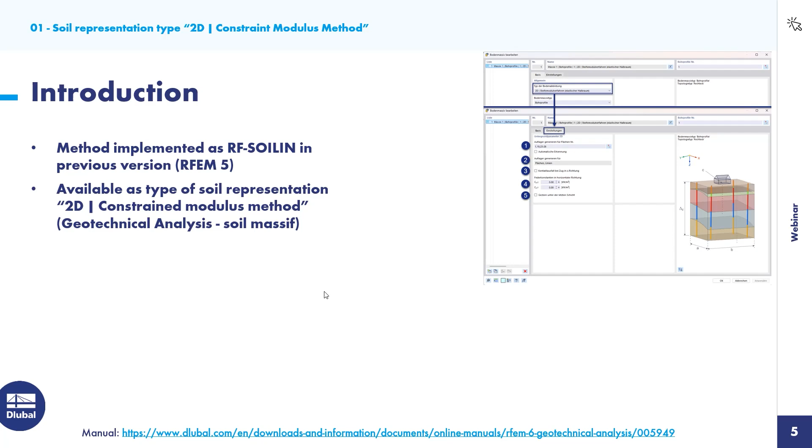So now we start with the new 2D constraint modulus method. This was a former version of RFEM 5 implemented as RF-SOILIN. Now it is available as a 2D constraint modulus method. Therefore, you have to activate the geotechnical analysis add-on and select a soil massif. Afterwards, the soil-structure interaction can be handled via generated spring stiffnesses. They depend on the soil properties, such as the layers and material, as well as the load and the foundation geometry.

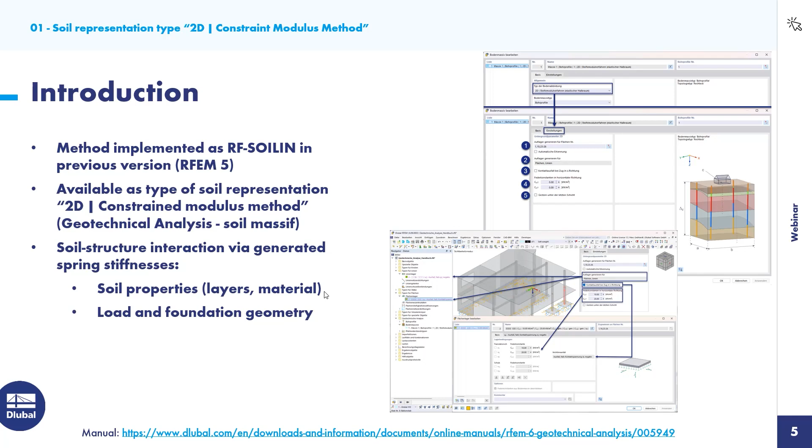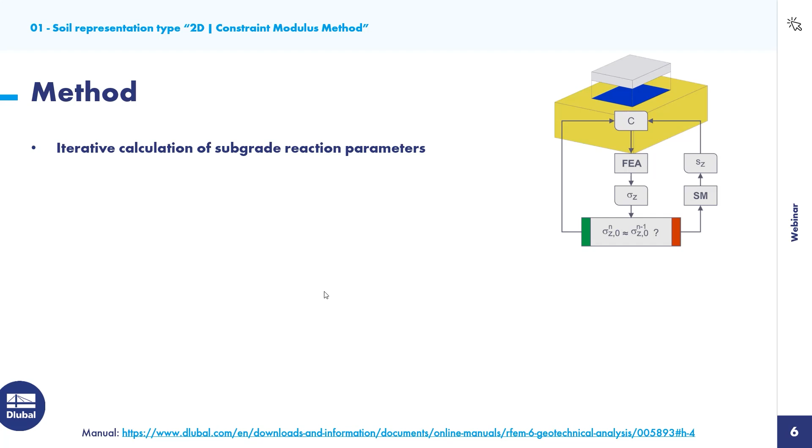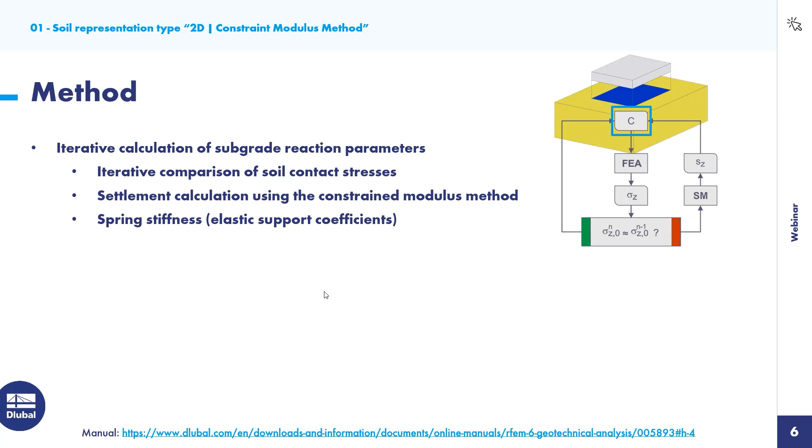Now I will describe the method. The constraint modulus method implemented here uses the iterative calculation of the subgrade reaction parameters by iterative comparison of the soil contact stresses. If the contact stresses from the former iteration and the actual iteration are not equal, the settlement calculation is done using the constraint modulus method and gives back spring stiffnesses as elastic support coefficients. They are available first of all for the surfaces and additionally for the lines, to get additional stiffening from the adjacent soil.

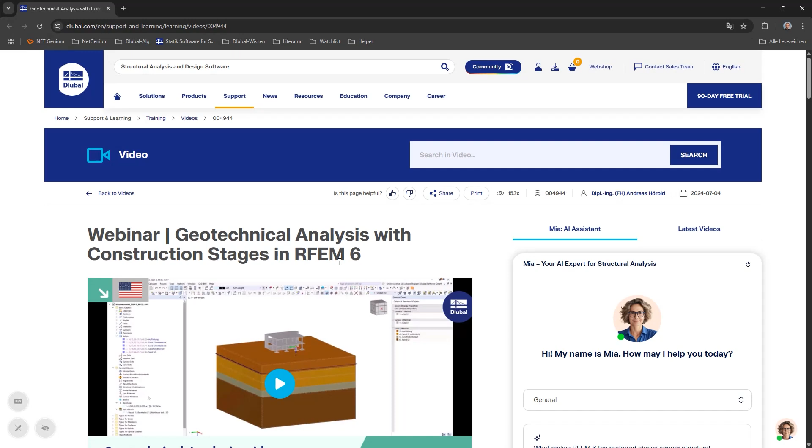Now we go to RFEM 6 and load the model from a former webinar, and I will show you the place where you can also download it. Here it's the webinar geotechnical analysis with construction stages, and there was a 3D analysis with a nonlinear material behavior based on the hardening soil model. You can download the file down there with a building and an already generated 3D soil. So go back to RFEM 6, and we see it's already loaded.

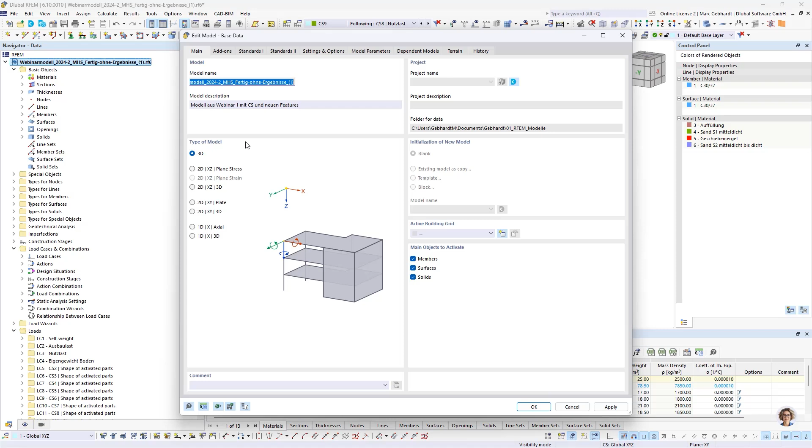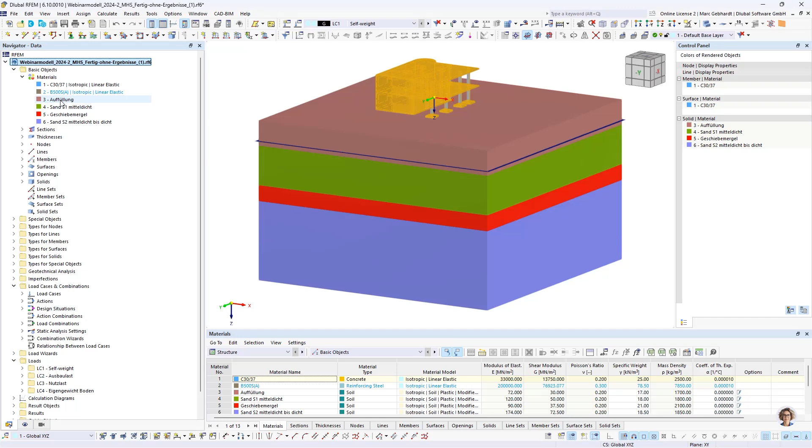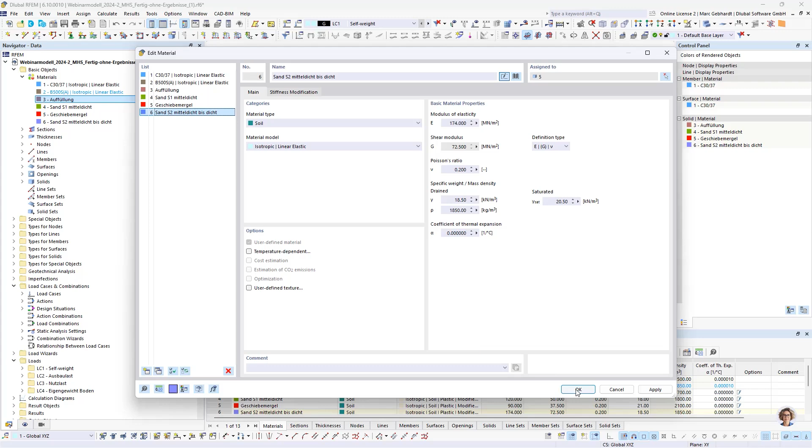We see there are already materials defined. They're using the modified hardening soil, and as you see here, they have basic material properties which rely on the loading and unloading Young's modulus. If this is really true for a 2D linearized behavior, it's not completely sure, so maybe for a real project you have to check it. But now, to simplify, we just select linear elastic, and we see the Young's moduli of the soil materials are changed and the behavior is now linear elastic.

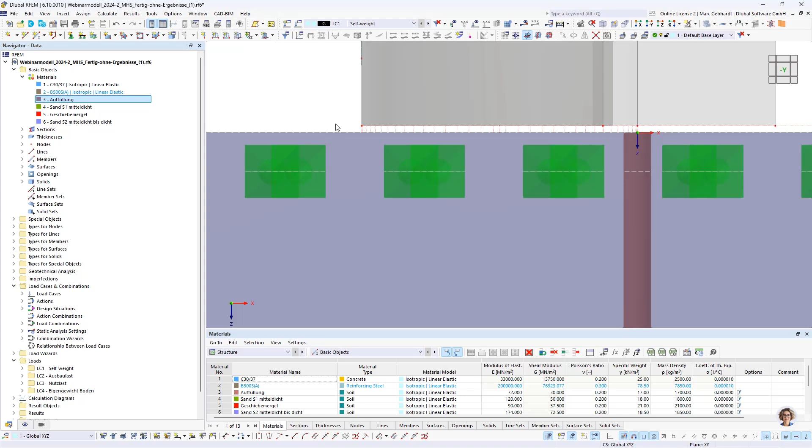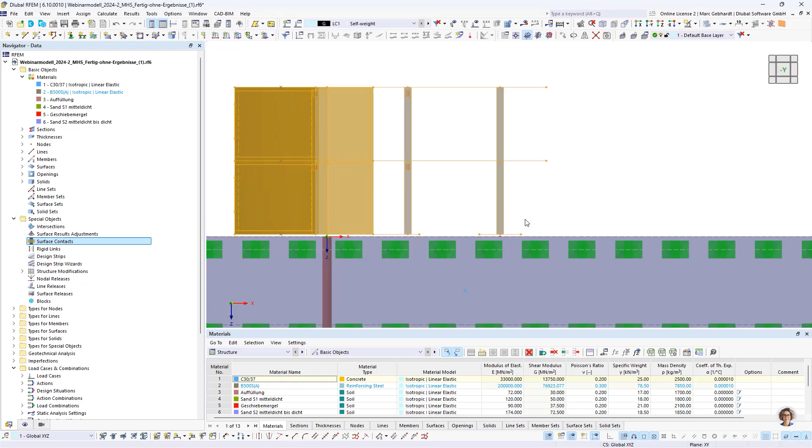Furthermore, we don't need surface contacts anymore. At the moment, the building is 10 centimeters above this upper soil surface. We don't need this anymore because the springs are generated automatically, finding the surfaces when they are on the upper surface of the soil massif. So we go to special objects and delete all surface contacts. Afterwards, we move our building 10 centimeters in Z direction. Now the base surfaces are touching the soil massif.

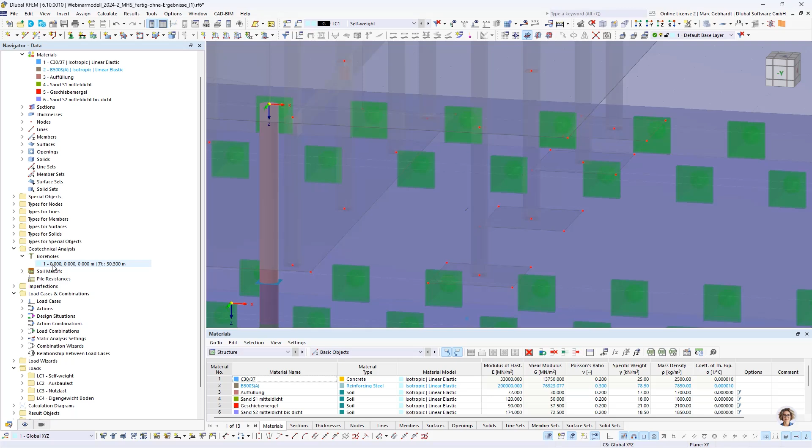Now we take a look at the soil massif itself. In geotechnical analysis, you find the boreholes, which are already defined by the other webinar, with the soil materials shown earlier. By them, a soil massif is generated, at the moment in 3D, but we want to change it to the 2D constrained modulus method. Now we see the additional settings tab is open, and here you have to select where the supports will be generated. You can select the surface by hand or use the automatic detection. Furthermore, in the future, it will be available to select on which parts of the surfaces, such as only surfaces, lines, and nodes, the elastic support coefficients will be generated.

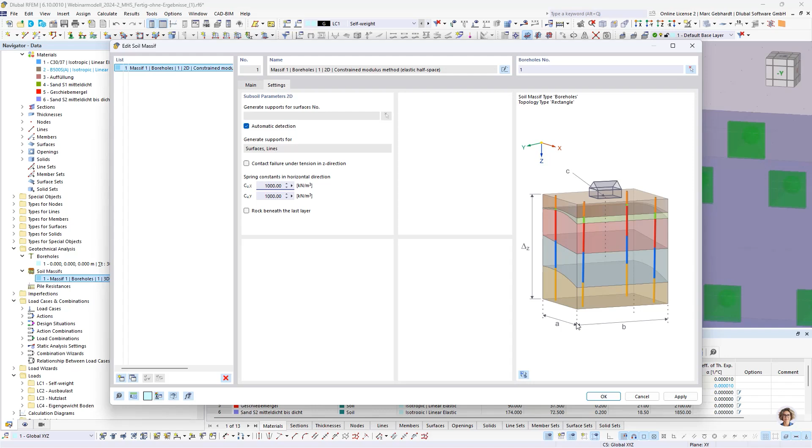And you can select to get nonlinear behavior on the surfaces and the line supports. But the constrained modulus method already has a failure under tension. Additional to the generated supports in vertical and shear direction, in horizontal direction, fixed supports can be defined here. And on the last point, you can select rock beneath the last layer, which says that the soil massif under this last layer is completely fixed, supported, and no settlement will happen, and stiffness will be very, very high, and so it stops there.

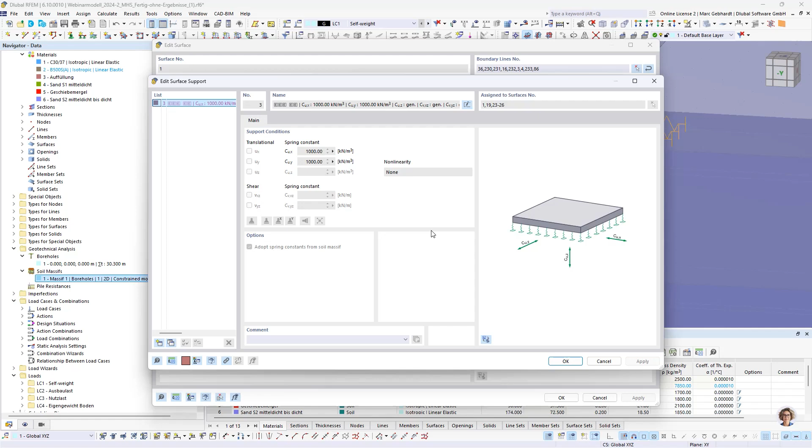And now we generate the supports, and we see now here our surface and line supports are generated. Take a look at them. We see that here in horizontal direction the fixed values are applied, and in Z and shear direction they are generated. Same applies for the line supports here, but they are only generated in Z direction.

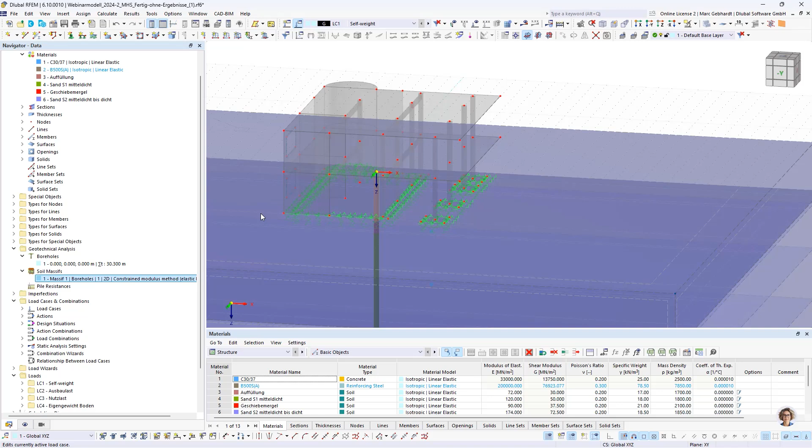Now we can start over with the loading. We don't need any more self-weight of the soil, because this is already applied within the constrained modulus method. So we delete this case. Now going over to the design situations, and we'll use the combination wizard for the ULS and the SLS quasi-permanent case.

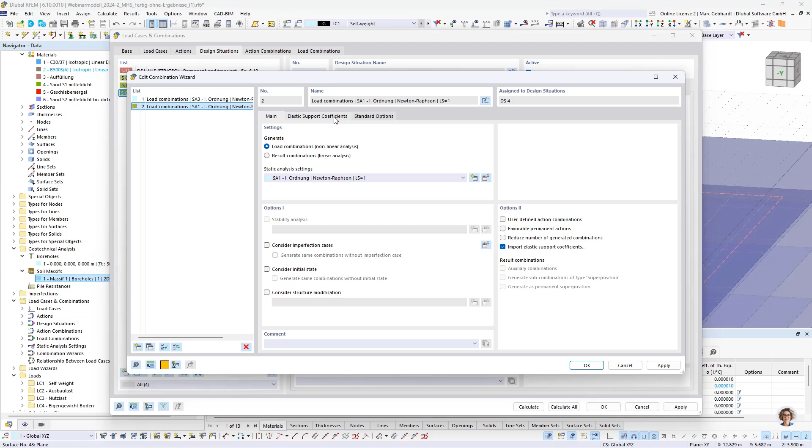So we use the second load combination with one load step, and also want to import the elastic support coefficients, a great feature to speed up calculation time, and as well get other support coefficients from a load case, maybe an SLS load combination to ULS. So we search for the corresponding from quasi-permanent for all of them. Good, OK. Go here also to OK. And now see there are some load combinations automatically generated.

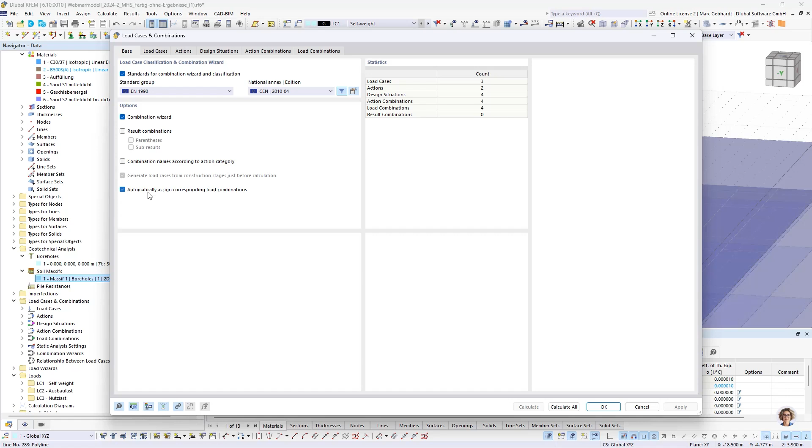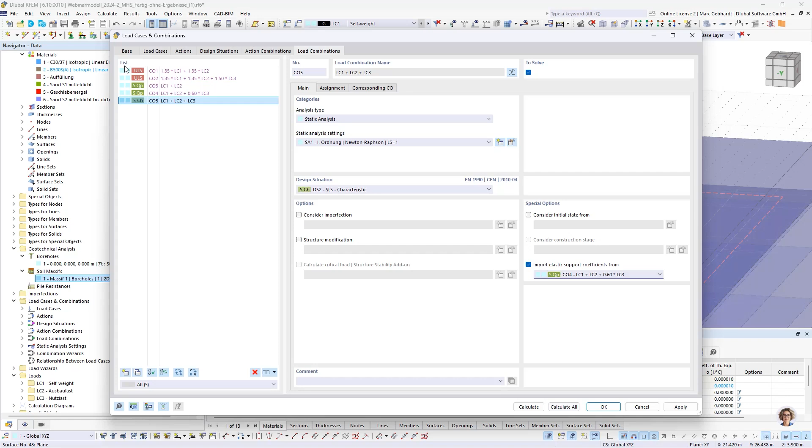Now we see here the elastic support coefficients will be calculated, and here they will be imported. To see the corresponding combination, at this point we will use automatically assign corresponding load combinations. And now we see they are visible here. We can also assign them by hand by taking a new characteristic SLS combination, setting the load factor 1, and assign them by ourselves here. Now we can calculate all of them.

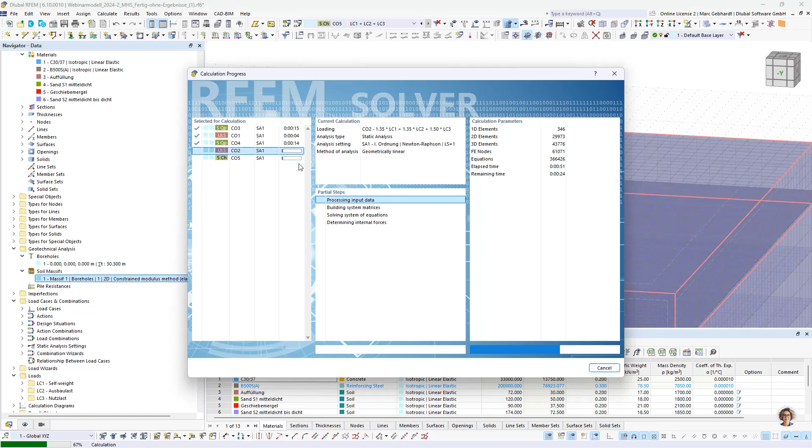As you will see, the settlement will be a little less than in the 3D calculation, which comes from the different behaviors of the methods, as well as of the implemented material behavior. Afterwards, we will check the settlements and as well the imported elastic support coefficients, and we'll see the different behavior of the soil building interaction. So as you can see, it's much faster than 3D calculation, but it also needs a few seconds.

And I forgot to show you something. It's within the static analysis settings. You have an additional thing for geotechnical analysis for the 2D constrained modulus method. If sometimes the iteration can't find an equilibrium, you can give a higher number of iterations or a lower precision by a higher value here.

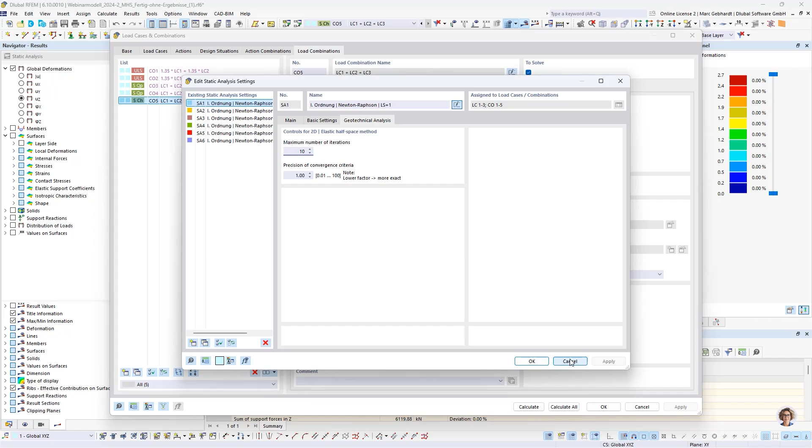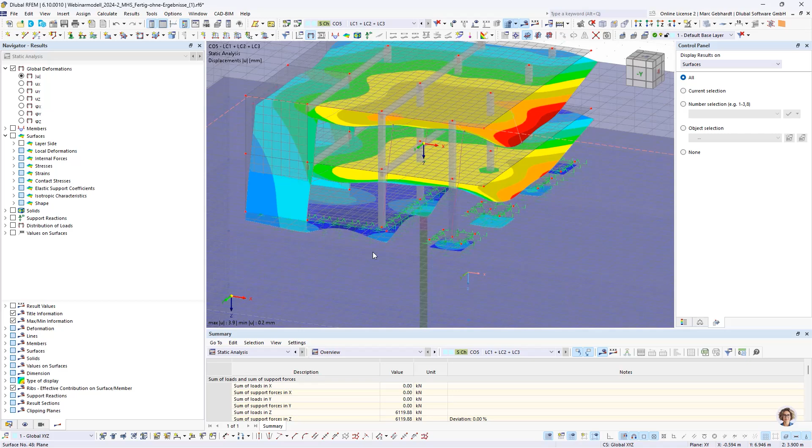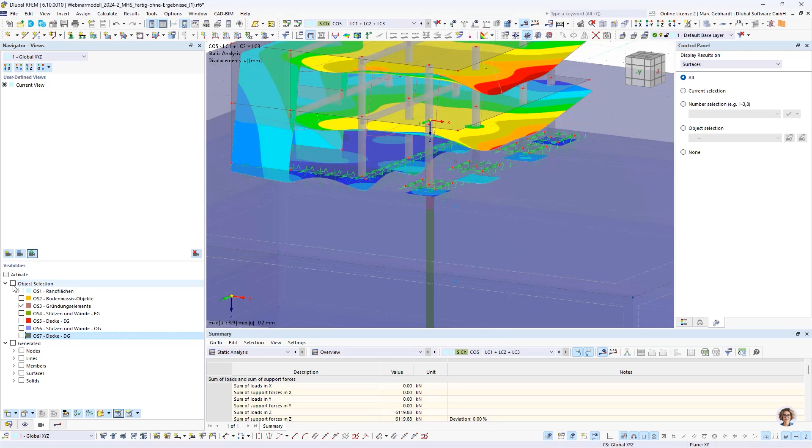But now we will see global deformations and can deselect all solids because they are not of interest at this moment, but would show all surfaces. Now we see the overall behavior is like it was for 3D. You see a higher settlement on this column, and as well in the middle on this middle wall than on a normal plate. At this point, we only want to see the base and also want to see the lines on the bases and not only the surfaces.

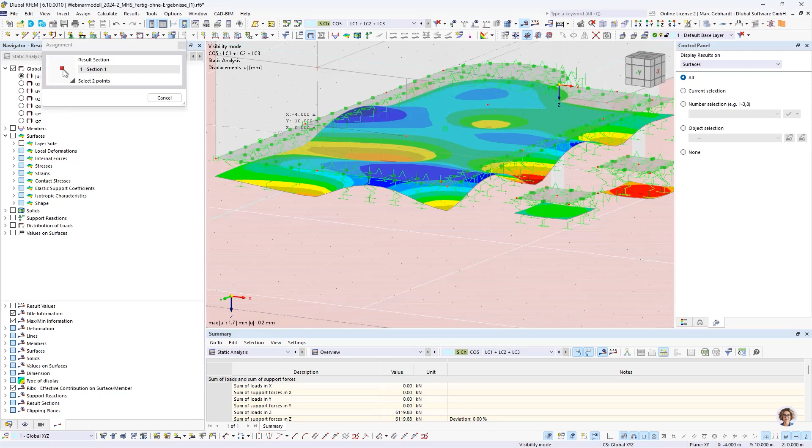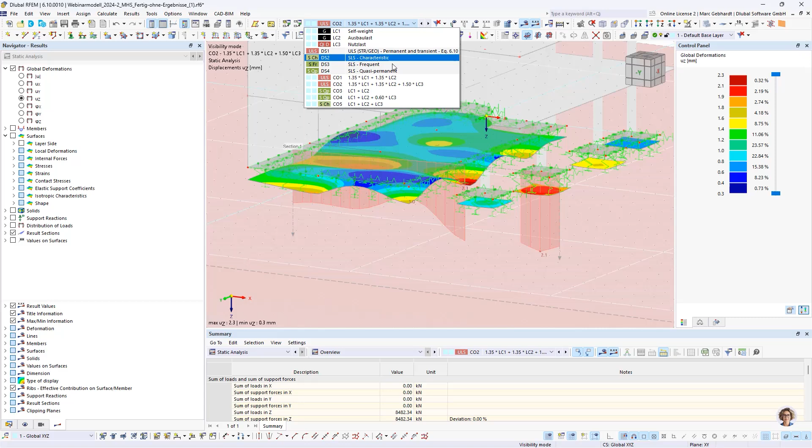So now we can also go through a result section and define this from here to there for the surface, and let's show the values on this result section. Now we see global deformation. It's mostly in that direction. That's true and right. And the characteristic, we have 1.7 compared to the ULS definition from 2.3, 1.6.

So, we can now check the elastic support coefficients on surfaces. Sorry. At this point I would show this one. Yes, those are the values I would show. And also within the support reaction, the elastic support coefficients for the lines. And we see in this and the other assigned, they are equal, so the input works as expected.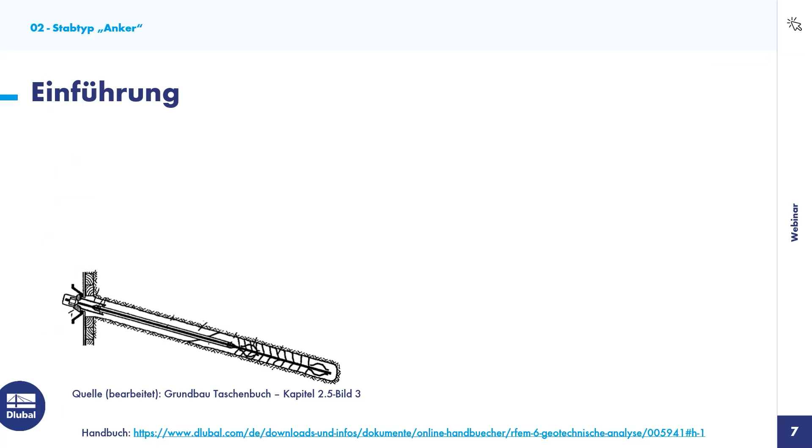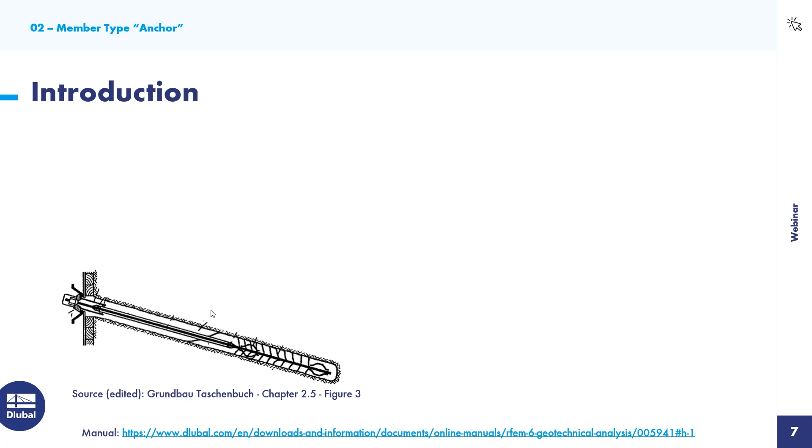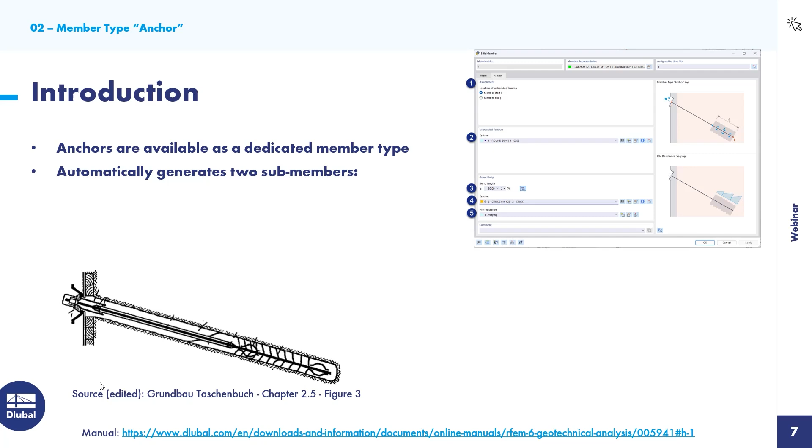So we're going forward to the next point, and I'll show you our next exciting feature, the anchors. Anchors are now available as a new member type within the geotechnical analysis add-on. They can be selected by the Add Member menu and automatically generate two new sub-members. This is first a tendon part without bond to the soil around that can only bear tensile forces, and a grout body with bond to the soil around, which corresponds to the member type pile with a pile resistance.

And now go over to the prepared model. You see here a slope stabilization for heavy goods traffic on top, modeled as a 1 meter slice volume with supports only orthogonal to the side faces and constraint support on bottom.

We have to select in the base data the geotechnical analysis add-on, and additionally, for a good representation of the stress state for the soil, the construction stage analysis, and for a later investigation about variable load, the structural stability add-on.

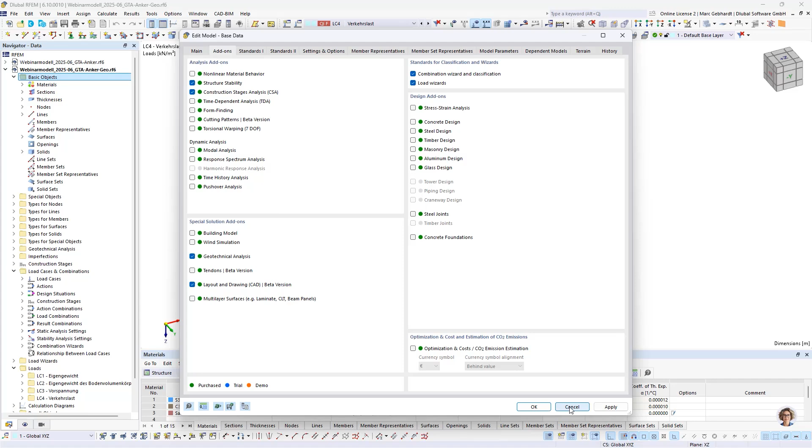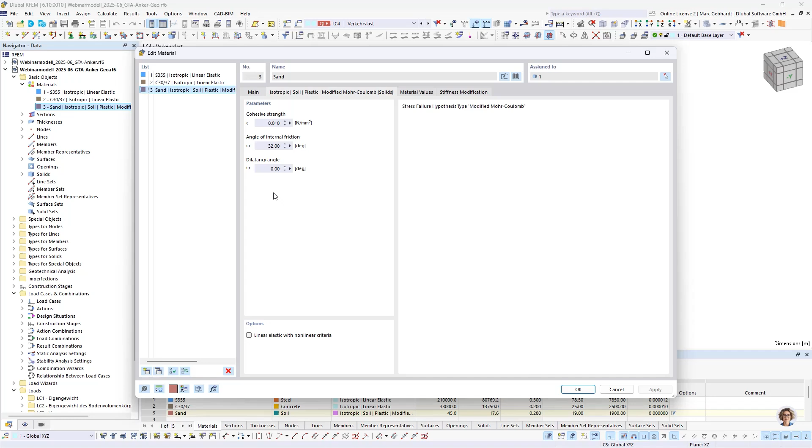I also prepared the materials, which is first steel S355 for the tendon part of the anchor, and a plate which will be placed on the side of the slope, and as well a concrete C30/37 for the grout body, and the surrounding soil is modeled as a sand with a modified Mohr-Coulomb material model with a cohesion of 10 kilonewton per square meter.

Sections are also prepared. It's a round steel bar for the tendon part and a circular cross-section with 125 millimeters in diameter for the grout body. The steel plate will be modeled as a 20 millimeter surface.

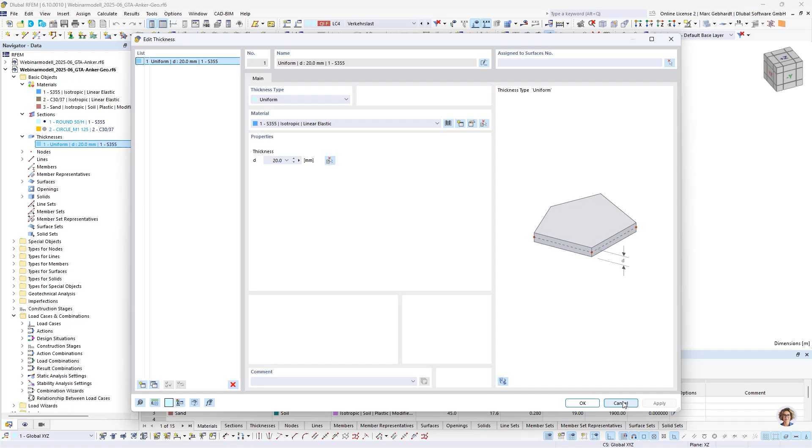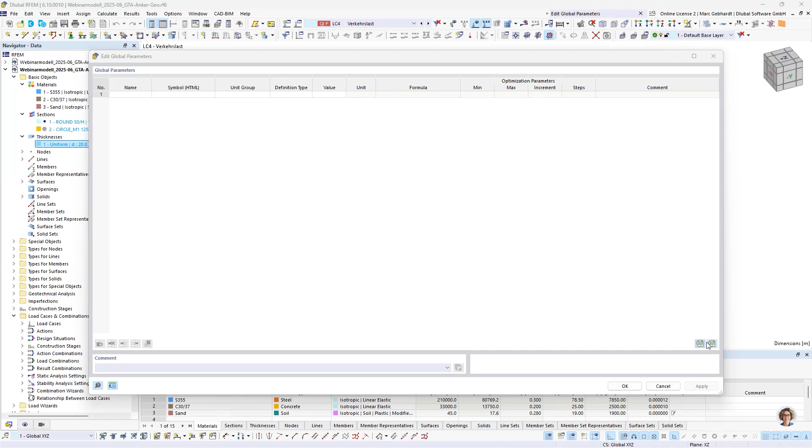So now, starting with the anchors, I want to insert global parameters for the base resistances. You can download them easily from this knowledge base article, and we want to model it for empirical resistances according to Tschurtschenthaler. You find them down here in the English version. I already downloaded them, so I only import them.

What we now have to do is to change some parameters. It's the material number of the soil, and this model is 3, and the cross-section number of the pile is 2. We will leave the bond length of the pile at 2.50 meters, but want to change the mesh fineness to double to speed up the calculation, but you can also try the original values. Furthermore, the resistance of the pile should be 0 for anchors. And now we're done, and the other values we need for the pile resistance will be calculated automatically by these formulas.

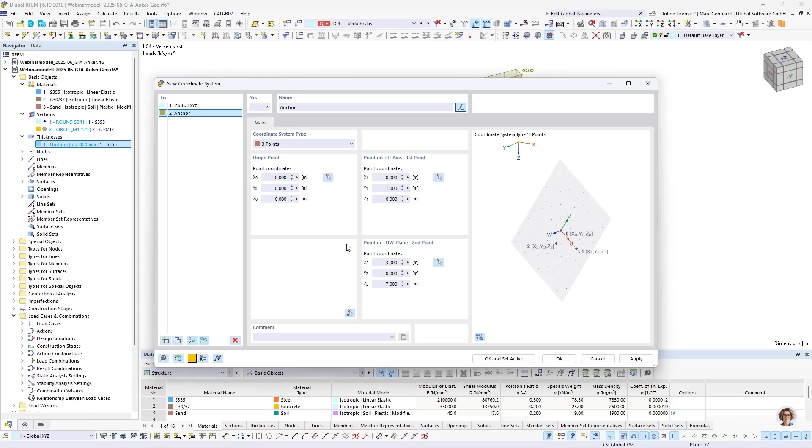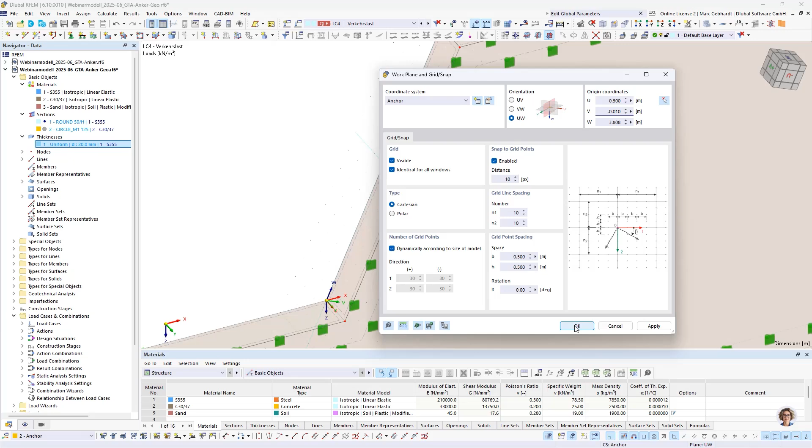So we start with a new coordinate system and call it anchor, and define it by 3 points: the origin, right direction, and the upper top of the slope. Set it active, and now continue with the origin, and we want the first anchor to be in the middle of the slope. So we change the position by 0.5 meters to the middle of the plate and minus 10 millimeters, so we can model a surface contact.

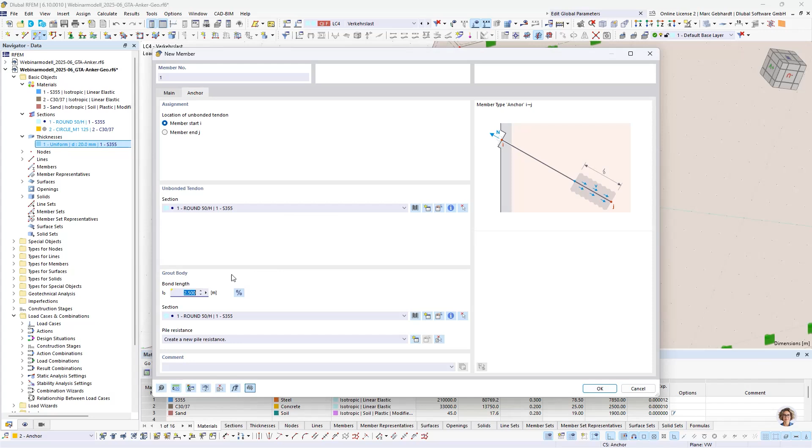So change to the right coordinates and get the new member type anchor. Here you can select the start of the member type. It's the first or the last point. In our model, it's the first point. The unbonded tendon will be the steel bar. You can select the length of the grout body from our global parameters, 2.50 meters, and select the cross-section for the grout body.

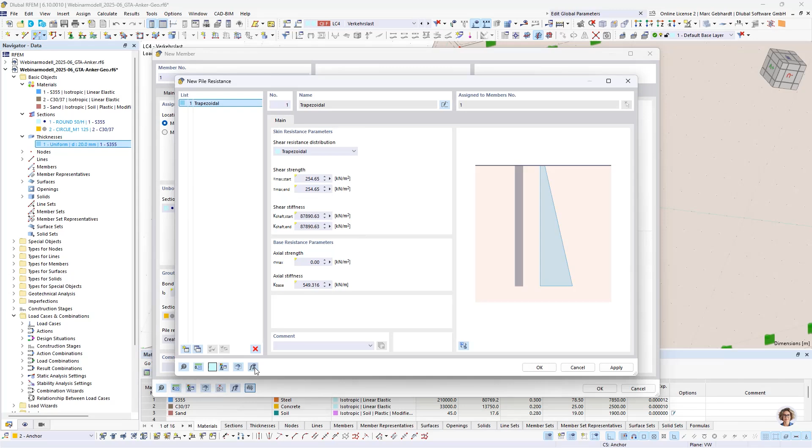Also, we create a new skin resistance and also use our global parameters. It's tau for shear strength of the skin. When we show the formulas, we can easily copy and paste here. And the shear stiffness will be Ks. Search for Ks, insert them, can also copy and paste. And for the base, it's also 0, we also insert sigma b and kb here. So we check the values again and see that's our calculated values. Go to OK and make a 6 meter long anchor.

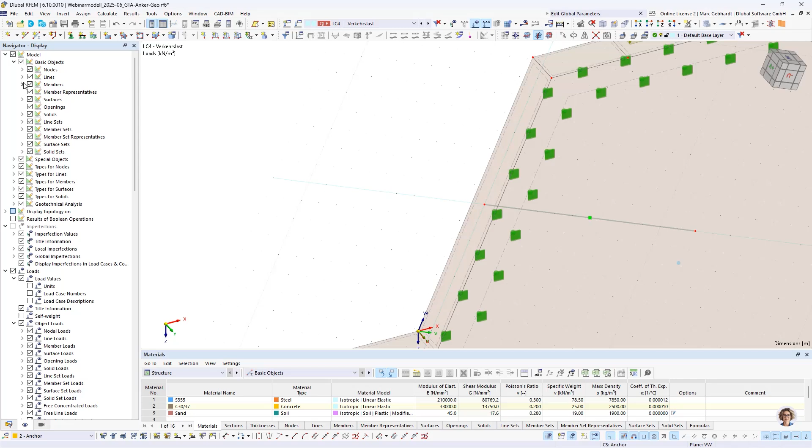Now we see the anchor is generated, and we see also the sub members are generated here. You can't see them at the moment in standard, but can easily make them visible by selecting the objects generated by anchor. So here is the pile part and the tendon part. So we go further and do a new surface via the center for the plate. Should be 50 millimeters larger than

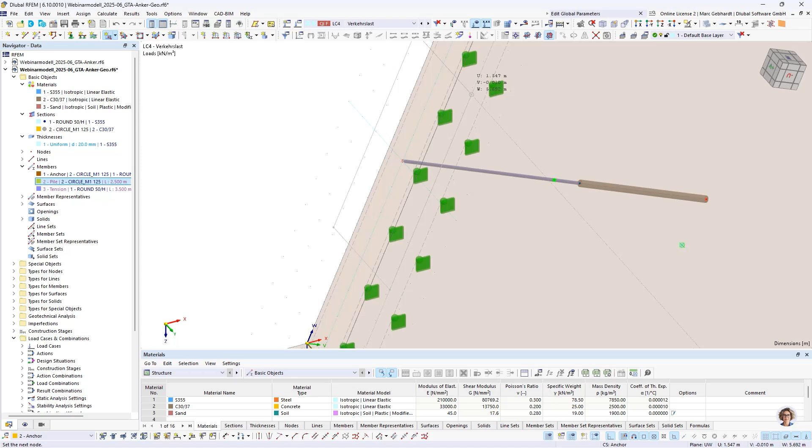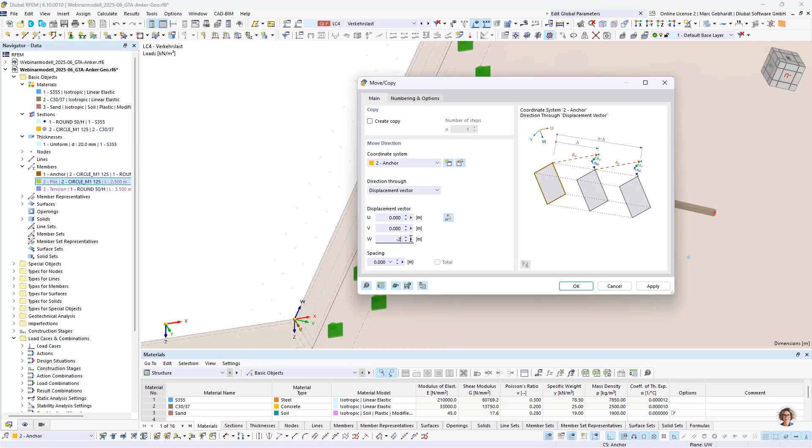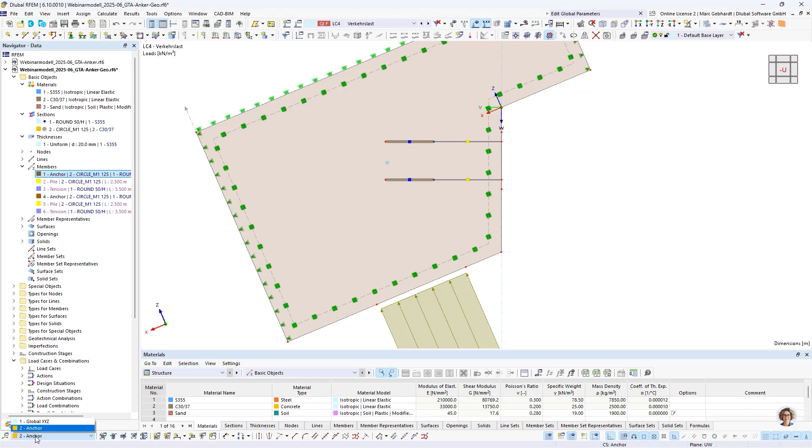Now we've got the anchor, and we want to do a second one, so selecting these nodes, and again the distance between the anchors will be 2 meters in minus W. Get a 3 meter plate, and also copy. Oh, that's interesting. Now we can also copy them by selecting the anchor in the navigator. Also 2 meters. Copy. Now our anchors are finished. Let's see, here are 2 anchor types. And now we make the mesh refinement.

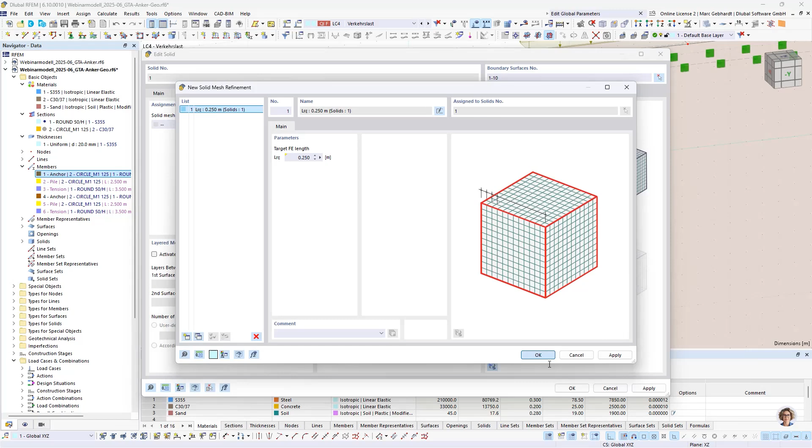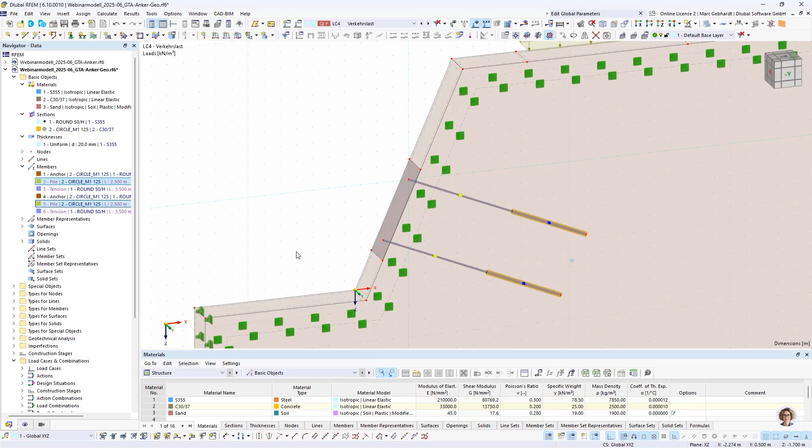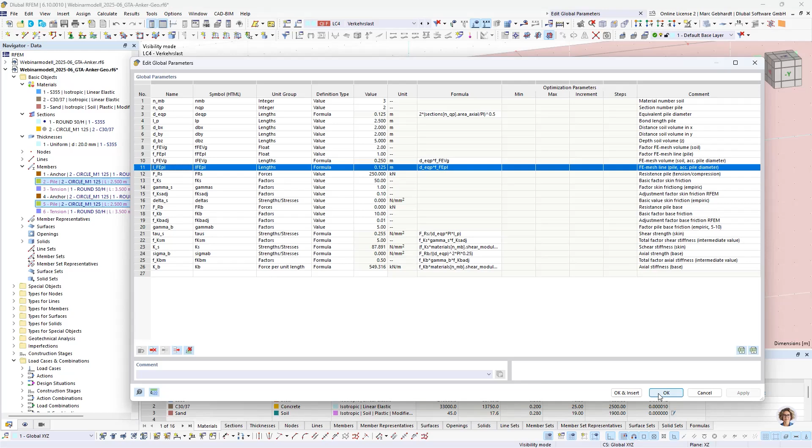At first, for the volume, also selected from global parameters, it's LFEVG. Okay, insert. Oh, I also want to show you something else that's very important. You see here the integrated objects for the solids, for the independent mesh. These are the lines for the pile types. And so they also get a mesh refinement according to their thickness, and it's easy. Select the lines, edit them, and give them a mesh refinement. New one, target FE length, global parameters, selecting this parameter, and now there is the mesh refinement.

So next we want to go over to loads.

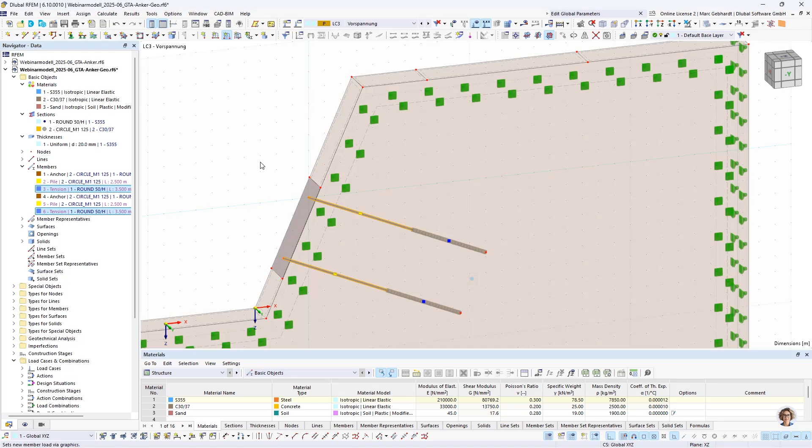See here our load cases: self-weight for the soil, the pretension for the anchors, and the vehicle load. We have to insert a pretension. Now, therefore, we can select tension parts, get a new member load on it with initial pre-stress of 100 kilonewtons. And now all loads are done.

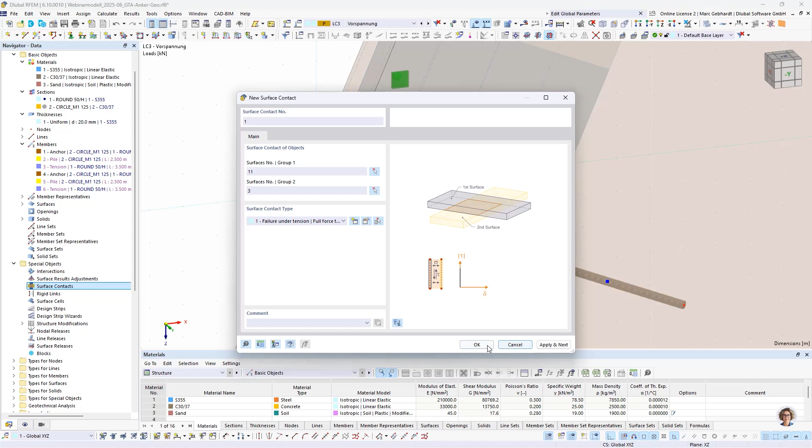I'm going over and take a look at the console. Oh, something else is missing. We need our surface contact. So we select the plate and the lower part of the soil. Get a failure under tension. Now it's generated, and going over to construction stages, which are also prepared.

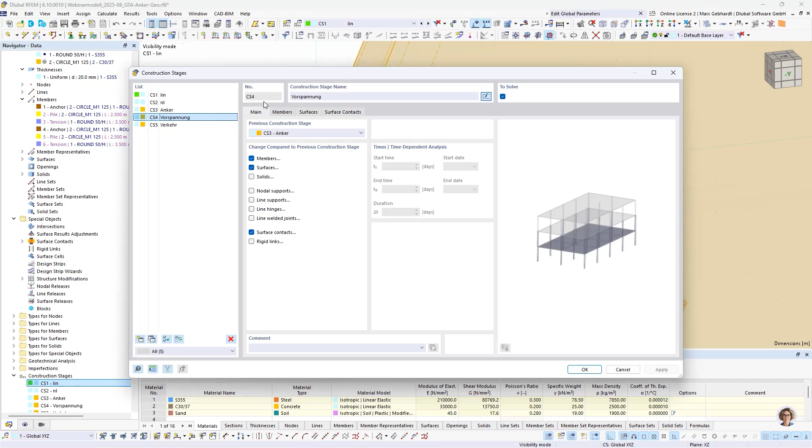We have a construction stage for the linearized stress, nonlinear calculation. Afterwards, the anchors will get self-weight, so the members, surface, and surface contacts will be active, and also pretension and the vehicle load. So we're going over and see our design situations. We only use the quasi-permanent part. We want to do the combinations by the combination wizard and consider the initial states from the construction stages.

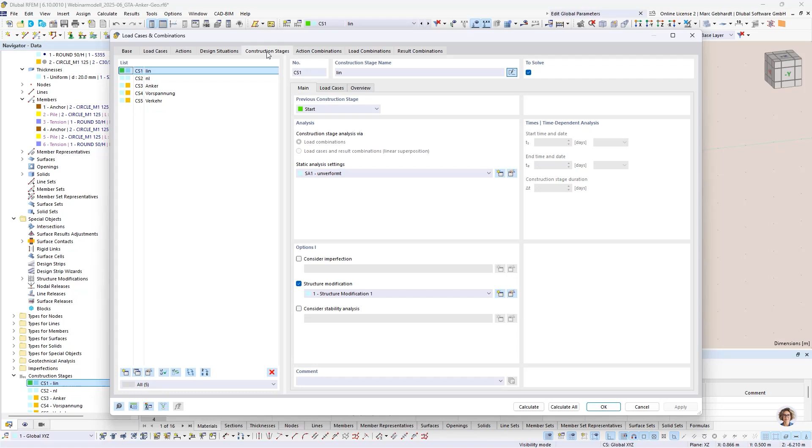Construction stages have to look at the first undeformed structure calculation for the state of stress, linearized by deactivating the material nonlinearity, then activating the nonlinearity. Afterwards come the anchors with their self-weight, pretension, and the vehicle load. So you see here are generated load combinations with the structure modifications and the static analysis settings. And here you see the initial state and construction stages.

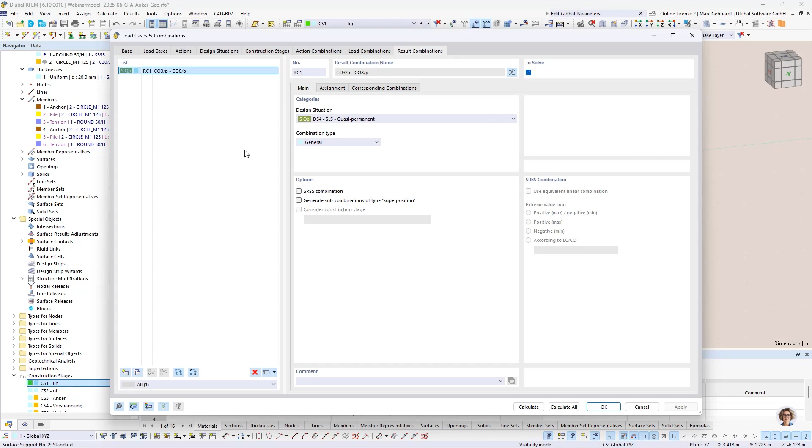And as said before, we want to do a critical load analysis by the Structure Stability add-on with the nonlinear incremental method until 100 millimeters deformation. Additionally, I did a result combination to see the additional contact stresses coming from the normal vehicle load, to see if our model is big enough.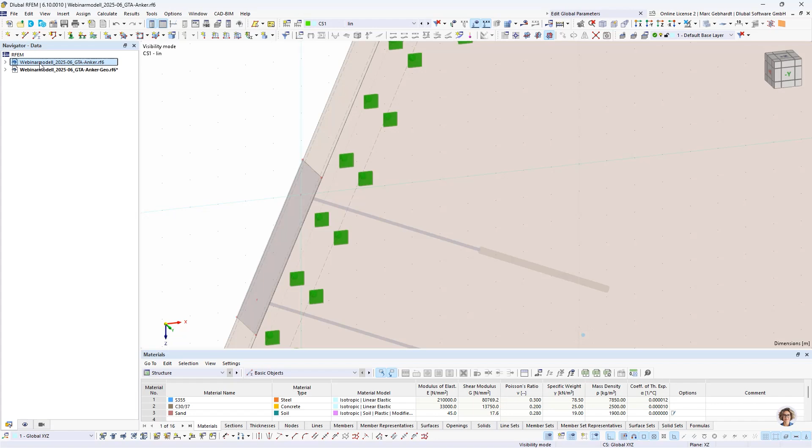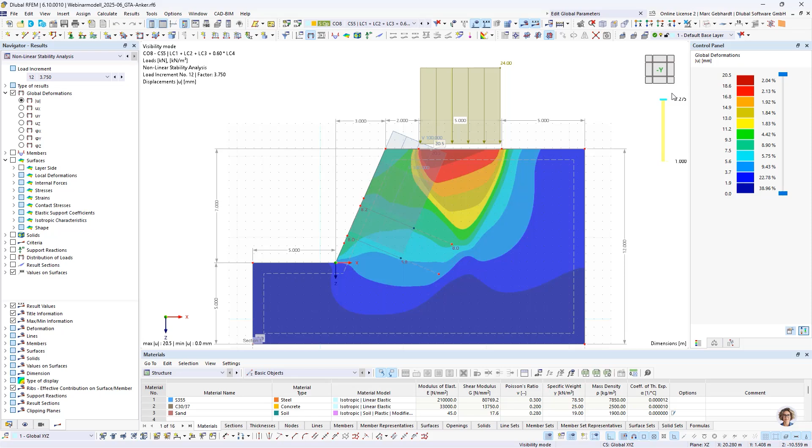So we now can do the static analysis for all of them, but I prepared an already calculated model, and here you see the global deformations by load combination with the vehicle load. You see it's only a high deformation on the top, and if we go to the nonlinear stability analysis, we see that we're going further and not in the middle anymore, as preparing for a slope destabilization. And activating the anchors until a failure comes with a little higher load.

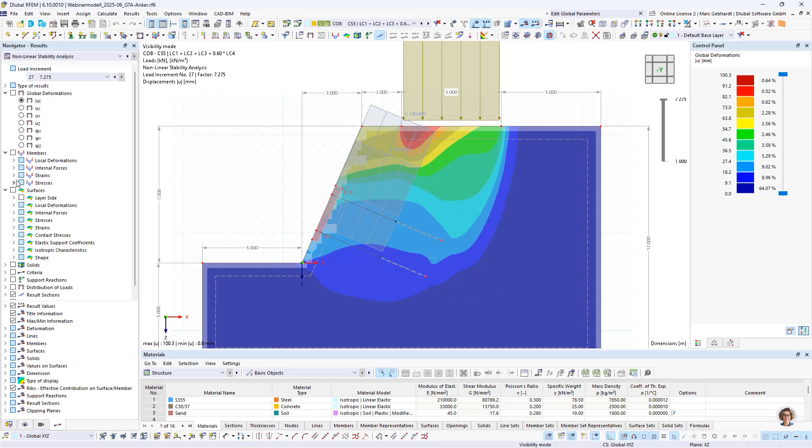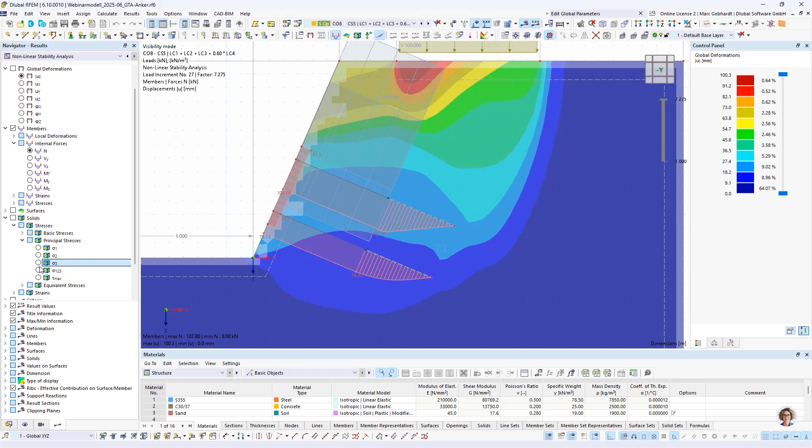So we also get the section values. I would show them as well. So you can check in the middle of our volume, and we want to see the internal forces, the normal forces in the anchors. You see here the pile part, it's rising up and going to a constant value for the tension part. And furthermore, we want to check the solid stresses, basic compression stress, see here, and the anchors have a high influence as we see. Better we see it also on shear stress, maximum shear stress. You see it, yeah, wonderful.

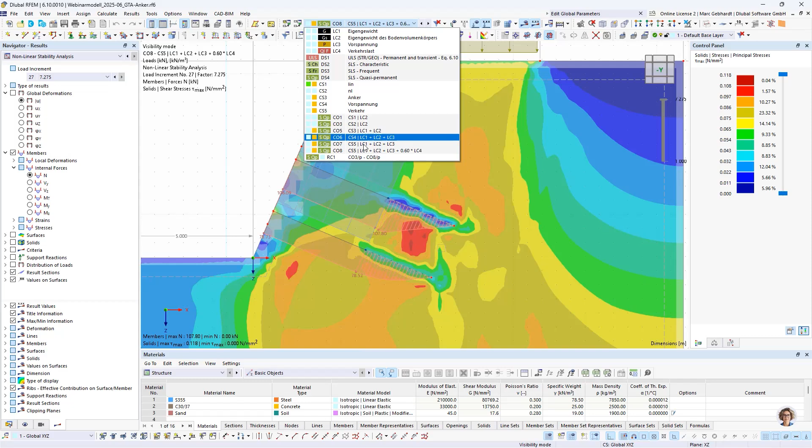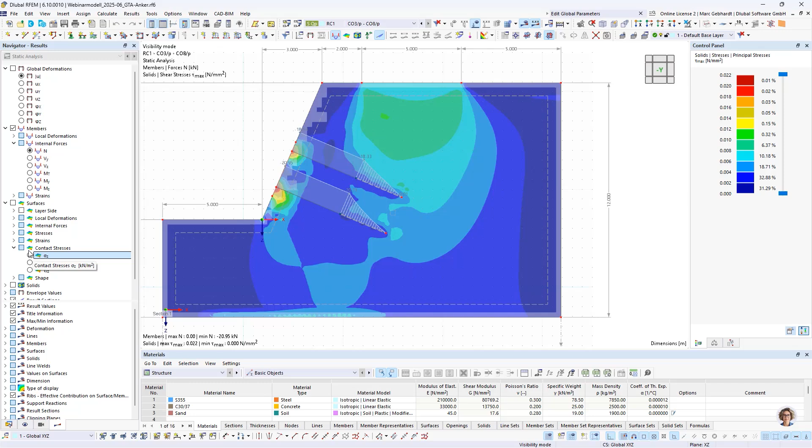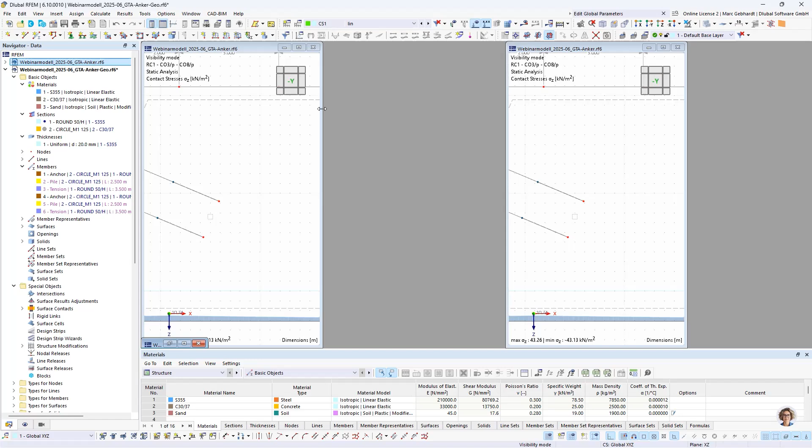So now we want to check the result combination to see our stresses in high values, and in a new window to check also the stresses in only self-weight load. So we see the contact stresses, surfaces on the slice, in a new window. Windows tiled horizontally. Vertically, I want to show them. Don't want to see this, but there are two of them here.

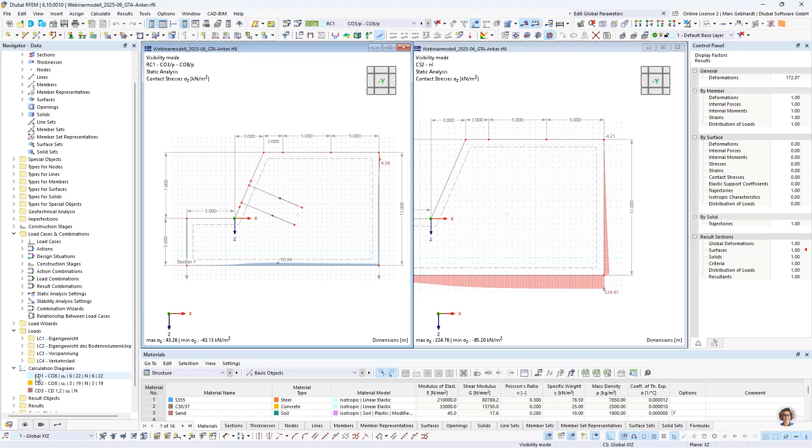And here we see the stresses, the additional stresses from vehicle load, and here we want to check the self-weight of the soil. And see, here we can show each result, but as you see, it's much less than 10% on the bottom. We only have a higher point on the upper right. Additionally, I want to show you calculation diagrams of the pile parts, as we see here. On the lower pile part anchor, the normal force is rising with the load and also the deformation in local x. Same applies for the upper anchor, and we now see here a combination of both of them.

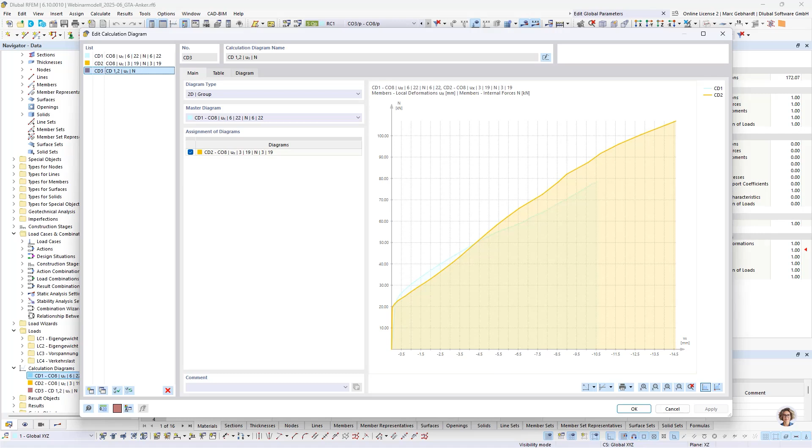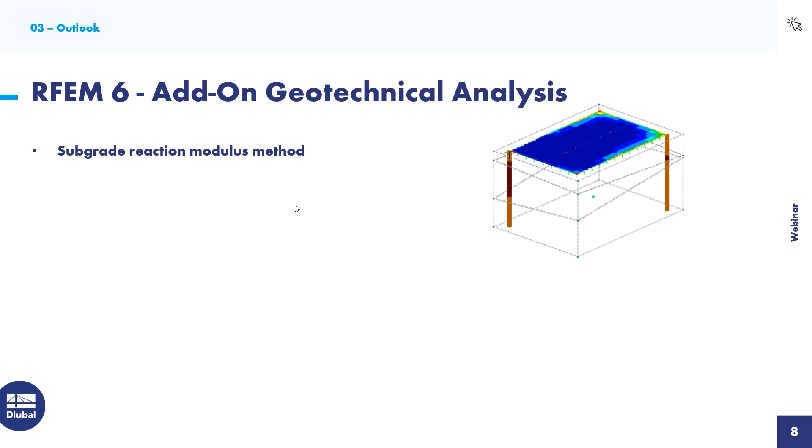So go back to our presentation and I want to show you the new exciting features coming for the geotechnical analysis add-on, which will be a subgrade reaction modulus method, additional to the 3D and the shown constraint modulus method, a stability analysis via reduction of the strength parameters for soil, a new Cam-Clay material model, and the model type 2D plane strain, which will be very beneficial for modeling such slices not by volume, but by a 2D slice. So thank you very much for your attention and I give back to Andreas.